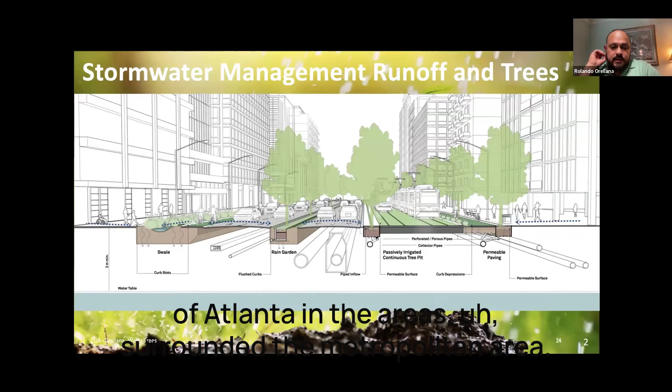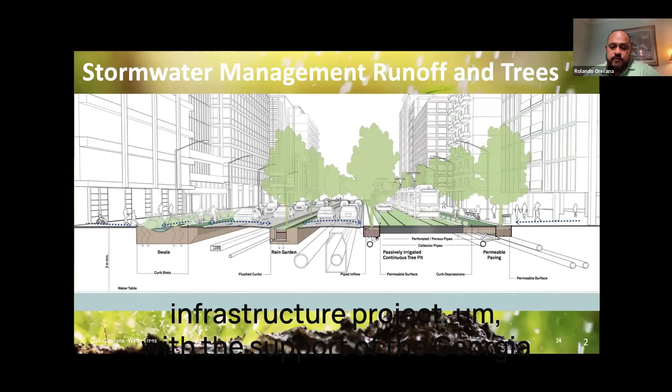This is a very exciting time to talk about stormwater management, runoff, and trees. In the city of Atlanta and the surrounding metropolitan area, trees are a big part of the industry, and stormwater runoff is becoming a problem for different municipalities and corporate and private developments. We are currently developing a green infrastructure project with support from the Georgia Environmental Protection Division and the EPA to create a demonstration site on the Griffin campus.

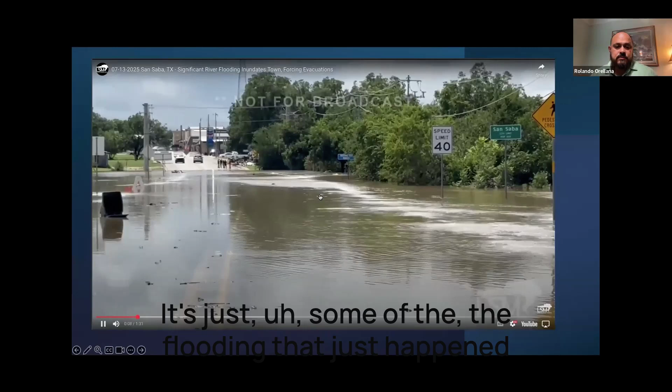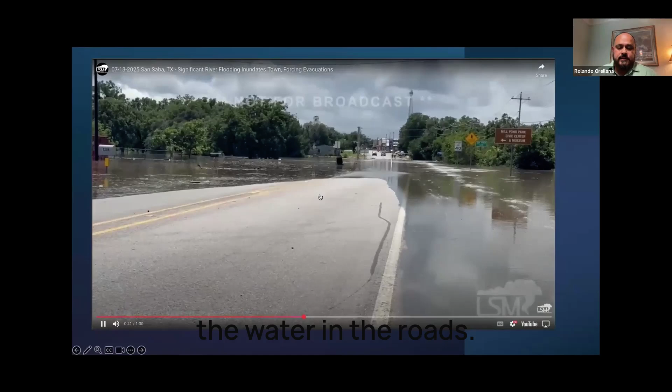So it's very exciting to talk about this topic today. I'm going to play this little video. There's no one speaking in it, it's just footage of flooding that happened in Texas, so you can see how stormwater is becoming more problematic every day as urban areas grow exponentially and infrastructure lags behind in some municipalities or cities. We have some fatalities shown here, as you can see the water covering the roads. It's a very devastating situation that happened in the state of Texas. You can see some of the highways and residential areas affected as well.

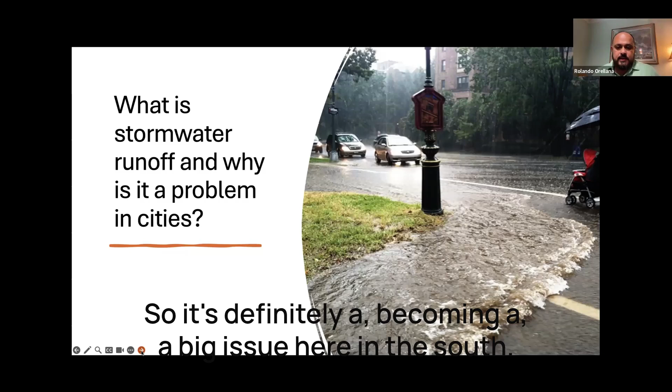So why is stormwater runoff a problem in cities? You can see the amount of water we get here in the state of Georgia. A couple weeks ago I was in Montana, and their yearly average is 13 inches. I think we get 13 inches within the first couple of months here in Georgia, so it's definitely becoming a big issue here in the South.

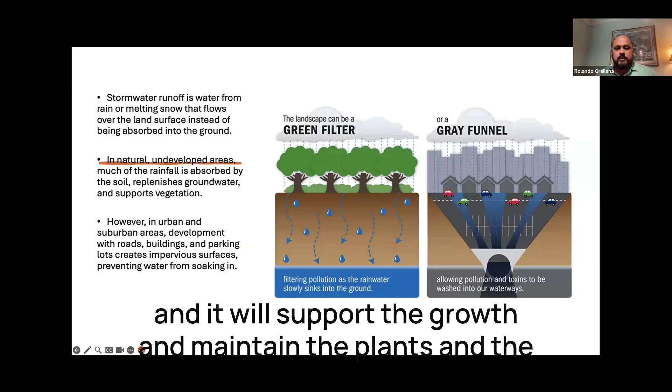The water we get from rain is so much that without enough infrastructure built in, all that water will just run off into rivers, creeks, and other water bodies instead of being infiltrated. In natural settings, rainfall is absorbed by the soil, which supports the growth and maintenance of plants, vegetation, and trees, following the normal water cycle. But in urban settings, that becomes a little more complex.

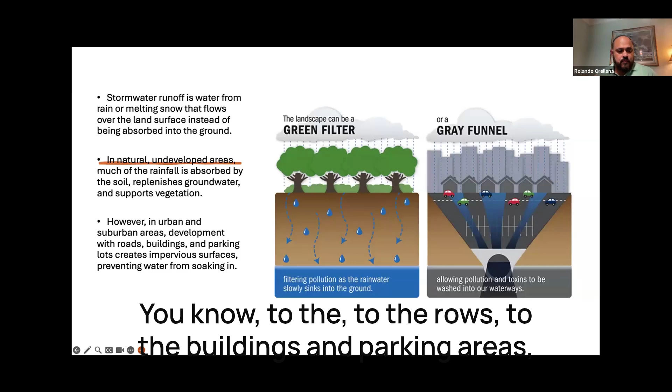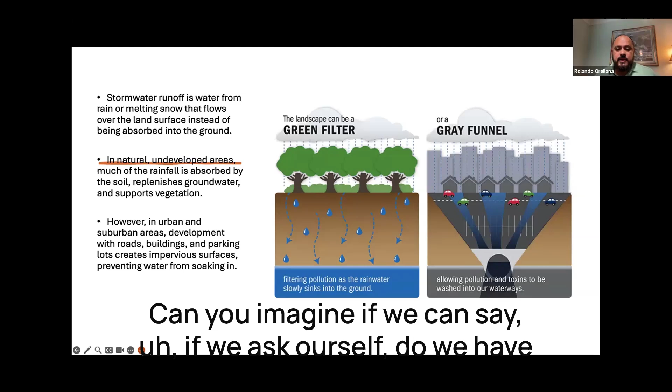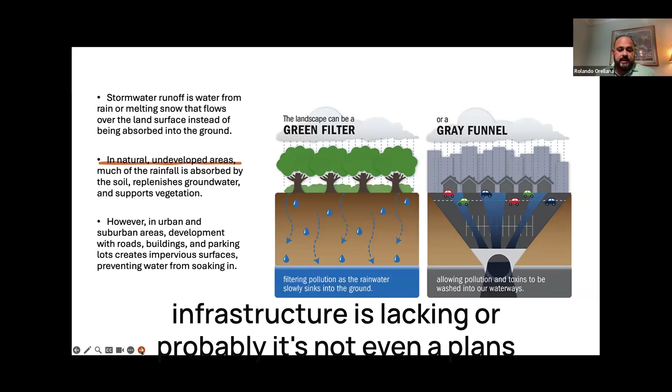Can you imagine if we ask ourselves, do we have infrastructure to help that water infiltration? Probably the answer will be no, because especially in developing countries, that infrastructure is lacking, or probably there's not even plans to build something that will better the water infiltration.

But in some areas it will go to other rivers and creeks and lakes, etc. And then eventually through evaporation it will go back to the environment, and then go through the cycle.

But some of those paths will go directly to the land. Some will be intercepted by the vegetation, so the trees. Some of them will be infiltrated. Some will be stored, and some will go back to the environment, to the evapotranspiration.

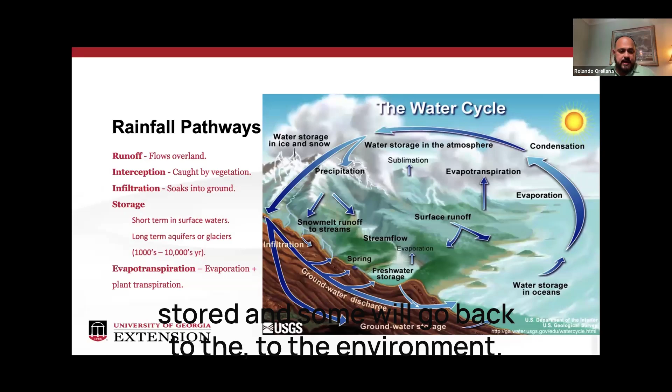Where is the problem? It is a problem, as we saw in the video. We've been having so many of those problems in big urban areas like the city of Atlanta. As you can see, the parking areas and roads are some of the more common and more built impervious surfaces that we have to deal with.

Because this will eventually collect so many pollutants, it will cause erosion and degrade the water quality in the ecosystems in general. This might be affected by soil conditions leading to infiltration excess overland flow.

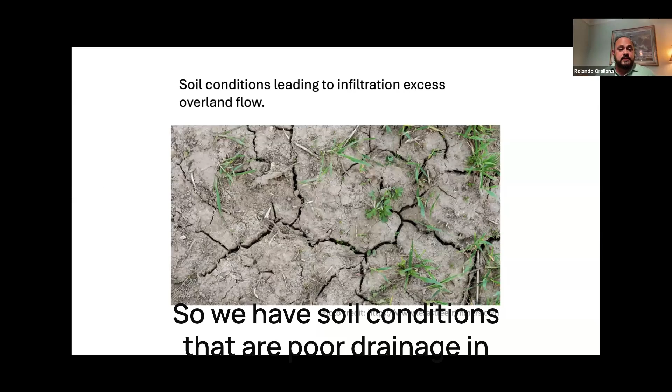So we have soil conditions with poor drainage. In the state of Georgia, we have the red clays, and eventually that leads to poor drainage. In the areas where we're going to have vegetation, we need to improve those soil conditions to better infiltration, or develop infrastructure that will support or mitigate that poor water infiltration.

What factors might affect that? In areas it will be the slope, how is the terrain, the vegetation, the type and density that we have, the soil structure - the silt, sand, or clay - and the drainage, what type of drainage we have available for the water, and the frequency of the rain that we have.

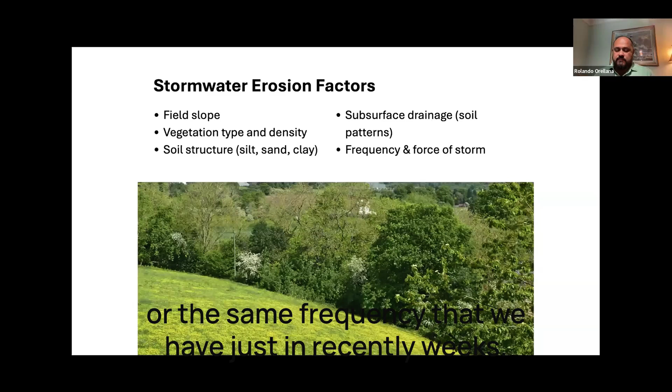You probably know this - I live in the city of Smyrna. There has been a lot of rain lately, but when I ask people that live in Griffin, there isn't the same intensity or the same frequency that we've had just in recent weeks.

How will the soil structure and infiltration affect that? Sands will infiltrate at a rate of 0.8 inches per hour. Loamy soils will be 0.2 to 0.4, and clay, with very poor infiltration, 0.04 to 0.2. In Georgia, we have an average infiltration rate of 0.2 because the majority of our soils is red clay.

High clay, compacted, poor infiltration. We have a lot of construction and development in the state of Georgia, and all that development - residential or commercial areas - is becoming, or making, the issue even bigger.

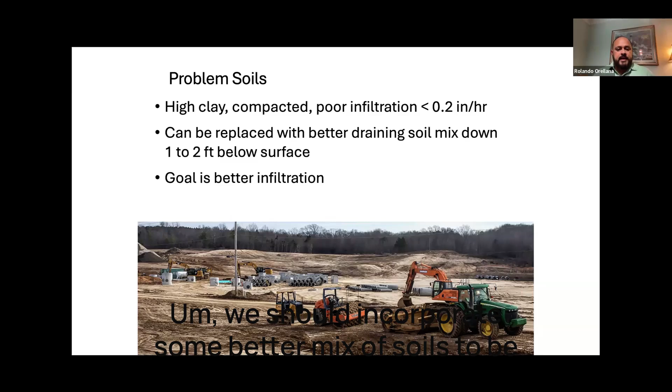We should incorporate a better mix of soils to improve that infiltration. We can add compost, topsoil, and manure and some of those things to better the water retention. UGA extension recommends 8 to 10 inches, depending on the area that you want to plant. But for trees, I would imagine this is probably even better.

This is some of the materials we will have for better drainage: vermiculite, mulch, compost, sand, and perlite will be something we should be more aware of and able to utilize when developing areas that will have trees.

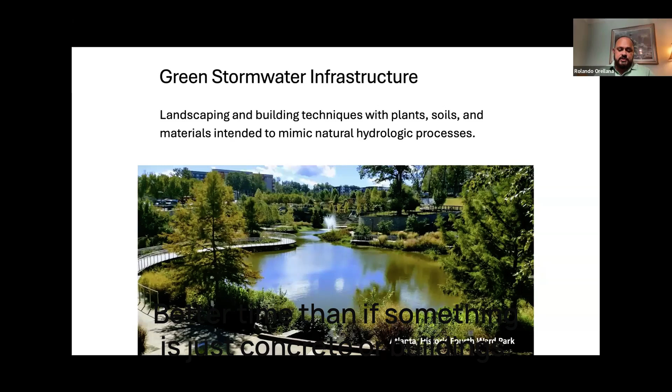You can see this is the Atlanta Historic Fourth Ward Park. This is a very beautiful place that mimics natural hydrological processes. As you can see, there's a combination of water, trees, and this green, beautiful space. I think that is something that will improve quality of life, and people will enjoy going on walks over there and having a better time than if it were just concrete or buildings and whatnot.

This is something that is great infrastructure - you see about the detention point, pond for storm drain.

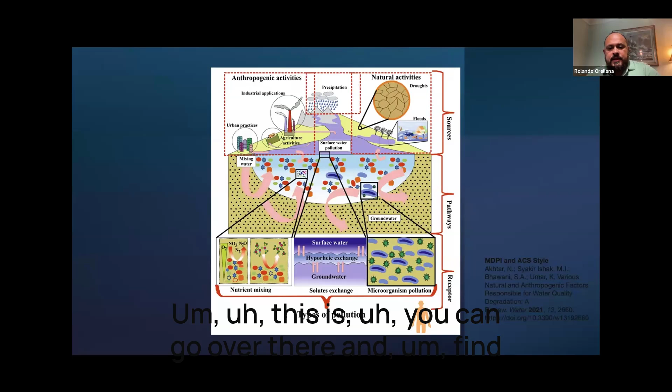This is a publication published by the University of Malaysia. You can go find this publication, but this is a very nice layout of how pollutants get into the water through all these processes, and how the pollutants get into the water masses. Why trees are important in our industry when we're talking about stormwater.

Trees are a natural stormwater manager. You can see here the rain, we've got the evapotranspiration, then the water infiltration. You see the water runoff in impervious surfaces.

You can see how big the tree ball is, and how nice it is. But when this tree absorbs water and translocates it through the vascular system of the plant or tree, and right now that we have very hot weather, the exchange of gases in the trees will be...

losing water. So that's going to make the trees require more water. And then when it rains, the need for water is going to be greater. So this will definitely mitigate stormwater runoff in urban settings, and it will support the infiltration and that water need.

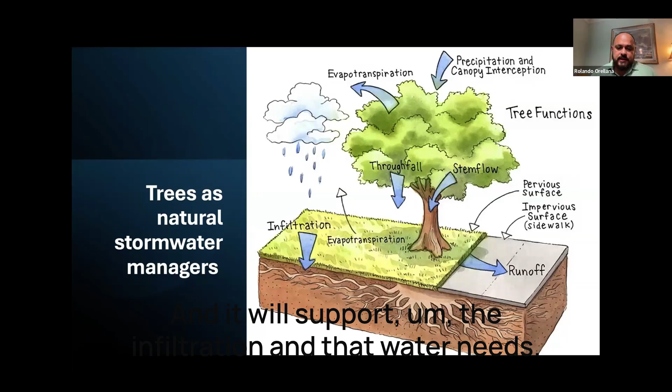So you can see here the interception and evaporation, or evapotranspiration. What happens is when the water hits the plant or tree leaves, some of that water will stay there, some will evaporate, and some of the water goes down through the stem of the plant and infiltrates into the soil, and then gets absorbed by the tree root ball.

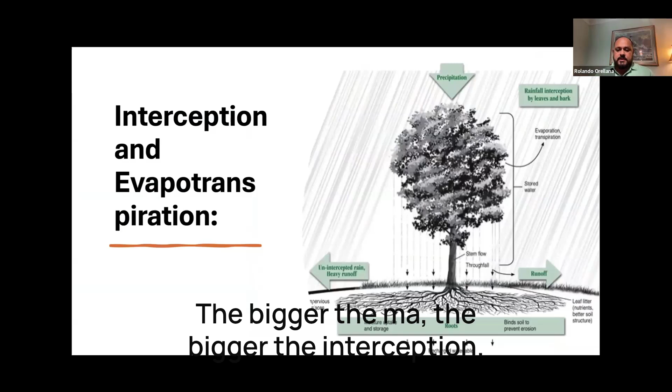The bigger the tree canopy, the bigger the interception. So that is very important. There is research that says trees will intercept around 13% of the total rainfall, or the full amount of rainfall. So that is very impressive.

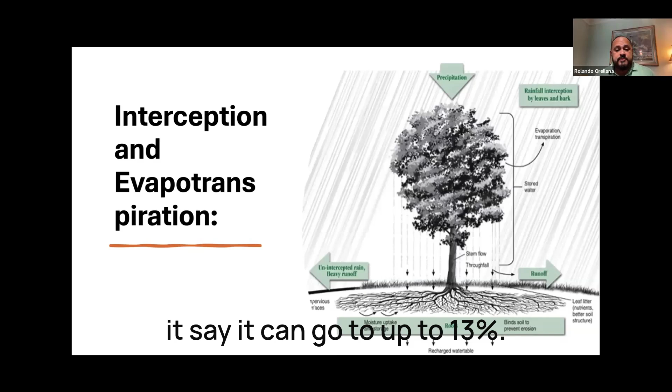But the research says it's around 8 to 11%. There are studies, especially in the northeastern United States, that say it can go up to 13%. So that's very impressive. The water that is in the leaves will evaporate into the atmosphere or be absorbed in the tree itself for transpiration, reducing the overall volume of runoff. So 13%, as you can see, is pretty good.

Mature trees are particularly valuable in rainfall interception because they have a bigger canopy and a bigger root system, so they cover a bigger area, and that is very important. That is why it's so important to provide the conditions we need for better tree establishment, and provide the conditions the tree needs to become mature.

Infiltration enhancement: tree roots and organic matter or leaf litter on the ground surface help loosen and aerate the soil in general. All that organic matter deposited into the soil supports water infiltration and water detention in the soil.

I know a lot of times here in urban areas, we blow away a lot of those leaves. So sometimes it's nice to let natural areas just keep the leaves so they can decompose and eventually become part of the soil structure.

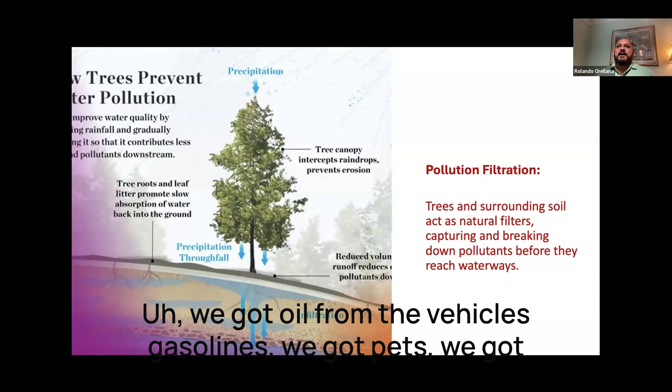Pollution filtration: trees and surrounding soil act as natural filters, capturing and breaking down pollutants before they reach waterways. We've got to think about this in cities - we have oil from vehicles, gasoline, pet waste, fertilizers, nitrate mixtures, so many different pollutants that will eventually reach the waterways through runoff. All those pollutants will be filtered, or at least mitigated, by having many trees in urban cities.

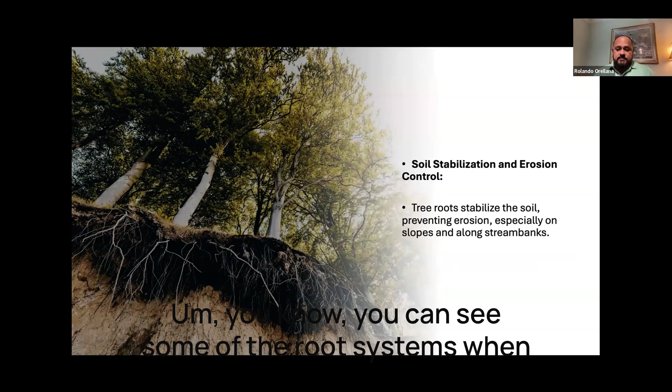Also, these trees support stabilization and erosion control. You can see some of the root systems when they're really well established - they're incredibly big, and they will support erosion management in areas like you see right here.

That leads us to how using trees in stormwater runoff or green infrastructure projects works. By the way, what is green infrastructure? You can see this is practices that help preserve areas and mimic natural settings.

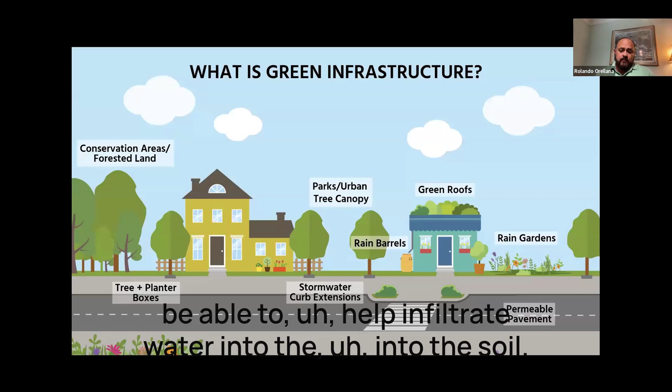As you can see here to the left, the conservation of forested lands - you can see all the trees - but then we have residential areas when we have urban and tree canopies. By preserving those and building better infiltration infrastructure, including green roofs, rain gardens, and bioswales, and disconnecting downspouts, we'll be able to help infiltrate water into the soil.

Some of the municipalities and other organizations in the state of Georgia have developed and built stormwater wetlands that support and help infiltrate that water into the ground.

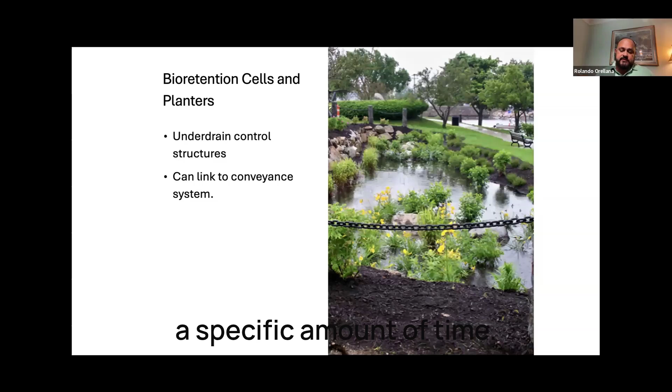Bioretention cells and planters. Some constructions there will have between 18 inches of gravel underneath, and then maybe a couple of feet of soil to be able to help infiltrate the water and retain it for a specific amount of time. Eventually that's going to go dry, and then there you have a good infiltration. But the 18 inch gravel layer will help support that infiltration.

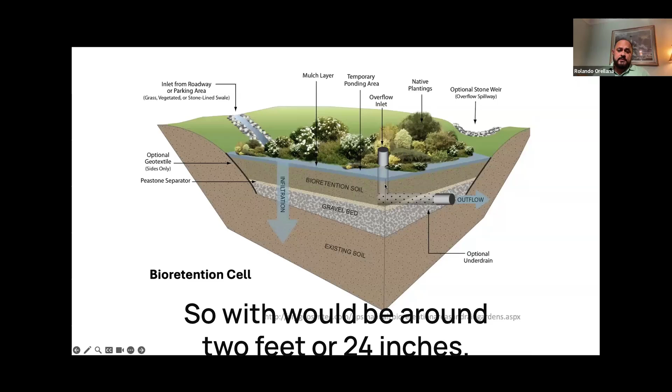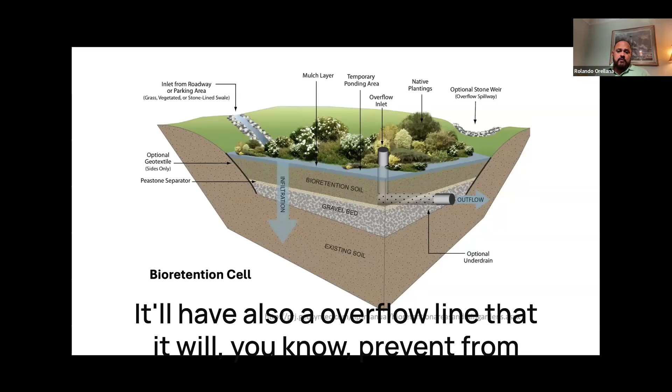You can see here a better sketch of what a bioretention cell is. You can see gravel in the bottom with the existing soil. Then you have the bioretention soil, which would be around 2 feet or 24 inches. Then you have some perforated pipes to be able to have the outflow of the area. And then the vegetation, as you can see, will be composed of native plants or plant materials that can be very useful. It will also have an overflow line that prevents the area from completely flooding, so it has a layer outlet for the excess water.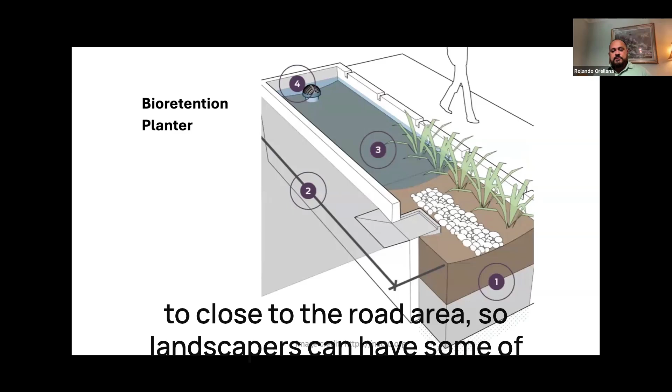Then there's bioretention planters. These are planters that go into the buildings and close to the road area, so landscapers can have some green spaces and also help mitigate the lack of infiltration. Vegetated curb extensions improve pedestrian safety and calm traffic, and there are some other benefits, but it also helps with infiltration.

They call it a bump out. As you can see in this photo, the drainage is right in this area. This is some of the other infrastructure you can use to lead the water to the soil.

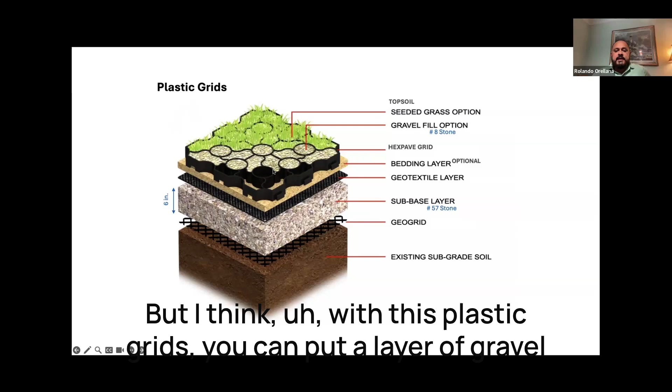Plastic grids - we're using some of these plastic grids. So many areas in the state of Georgia and the metropolitan areas like grass, but with these plastic grids, you can put a layer of gravel, and then you can still put a small layer of soil, so you can have grass. That gives you a very good looking grass area, but it's very permeable, and that supports water infiltration as well.

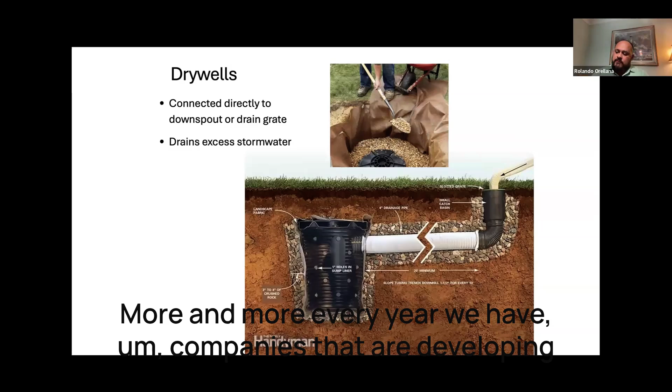Dry wells are probably very common, used to connect the downspout of your house, and they drain all that area. This is becoming a very common, not expensive, green infrastructure project. More and more every year, we have companies developing and presenting options for green infrastructure projects like this.

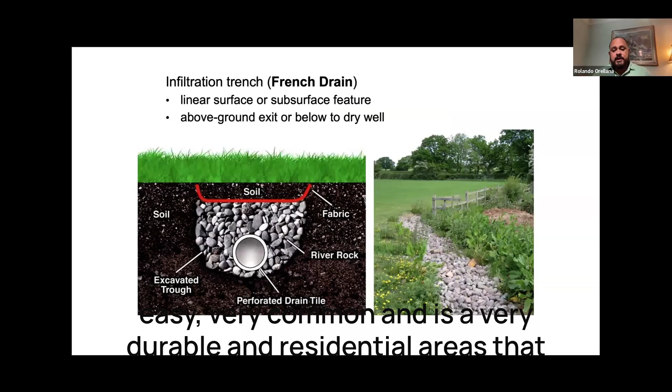French drains - we also built one of these French drains at the UGA demo site on the Griffin campus. It's something that is easy, very common, and very doable in residential areas.

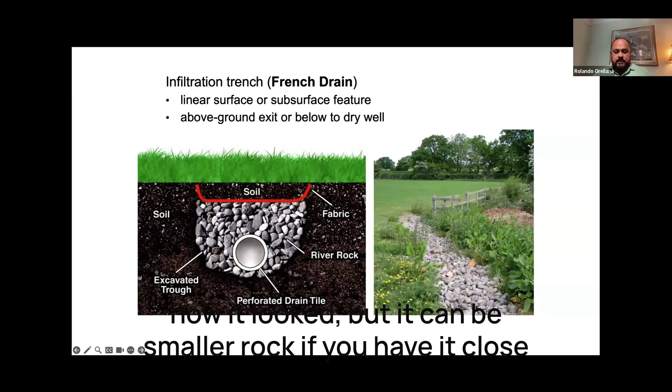Some of the other stormwater options that can be utilized: you can see here you have a layer of soil at the surface, then you plant your grass, garden, or ornamentals. Then you have this area with gravel or river rock, and then perforated pipes that you can have. You can see in the photo on the right how it looks. But it can be smaller rock if it's close to parking lots and more impervious surfaces close to buildings.

Then we have bioswales, which move water horizontally through vegetation. We also have one of those bioswales at the demo site on the Griffin campus. It's a very nice buffer zone before you get to the rain garden, leading all that excess water into the rain garden. These are also very common and utilized practices in green infrastructure.

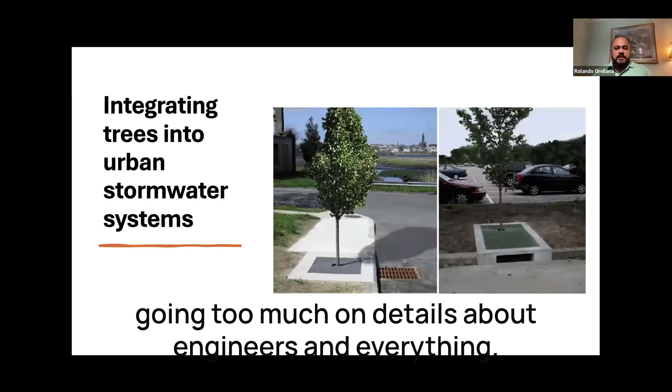Since the Georgia Arborist Association deals with trees, incorporating trees into urban stormwater systems is very relevant. So we're going to talk a little bit about that without going too much into detail about engineering. I don't want to come here and tell you exactly how to design this, since I'm not a landscape engineer, but I think we can touch on some of these practices.

Intentional tree selection and placement in urban areas is very important to understand, why you want to place a specific type of tree in an area, and in the areas that you want to develop.

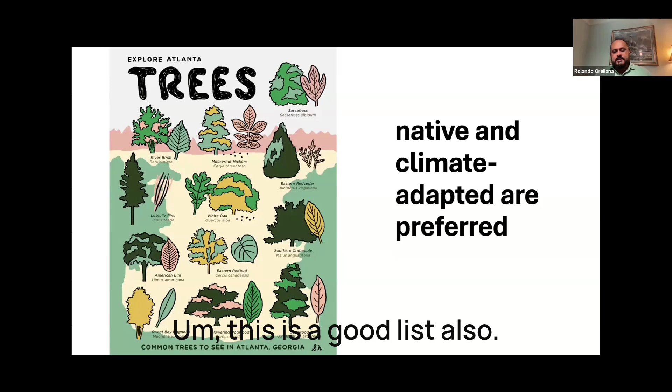Native and climate adapted trees - I was looking and found this book, Common Trees to See in Atlanta, Georgia. You can see river birch, loblolly pine, white oaks, and eastern red cedars are some of the trees you probably will be using in projects you will be working on. This is a good list. I also found this from a publication from the University of Georgia.

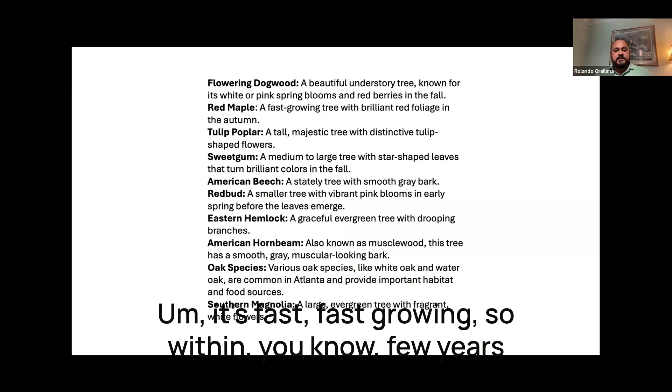Flowering dogwoods are beautiful, are very popular, and they're not as big. They will be appropriate for some very urban settings. Then we got the red maple. It's fast growing, so within a few years it's gonna be completely established and it will have this beautiful red foliage. And then the tulip poplars, the sweet gums, American beech, redbud, eastern hemlock - all those are really good materials that can be utilized in some of the projects. And you're probably already working with those type of trees.

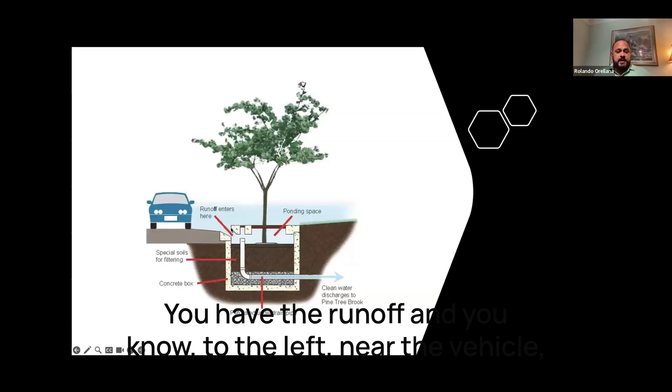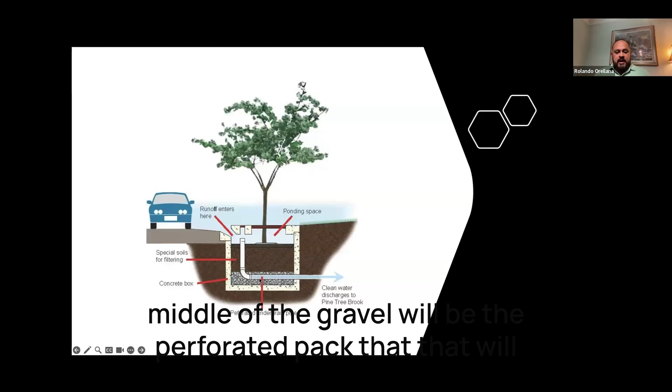Engineered systems utilize trees, tree trenches, and tree boxes. You can see this right here - these are becoming popular, this is in Iowa. The concept is that you have this tree in the area, you have the runoff to the left near the vehicle, and you have that surface. The tree will have a space in between the crown and the part of the stem, and then there will be a soil layer before you get to the gravel or perforated pipe. In the middle of the gravel will be the perforated pipe that acts as the outlet of the water, and the runoff will get into this area and drain into the pipe, leading away to the Pine Tree Brook.

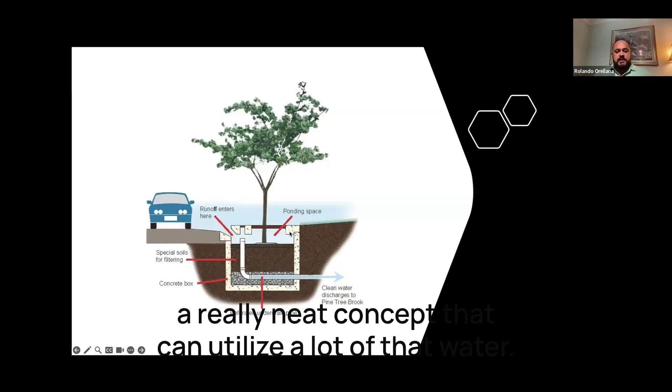This box is a really neat concept that can utilize a lot of that water. It can be used to support the trees. And if they are in a specific area, infrastructure can be built to support all the surrounding trees.

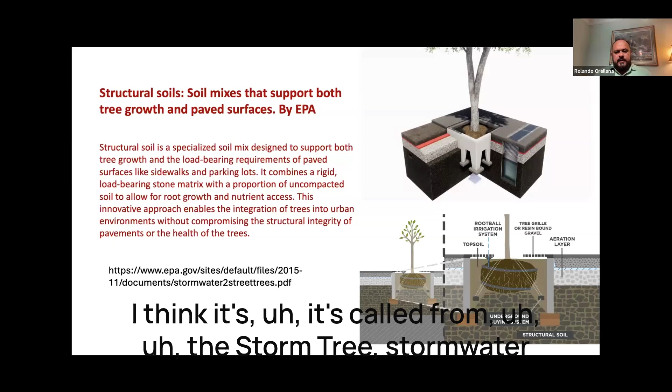The EPA has a publication, I think in collaboration with Davey Tree, about structural soils. Very good publication, I recommend you use it. I think it's called 'Stormwater to Street Trees.' That's a PDF you can download - this is the website where you can download that PDF.

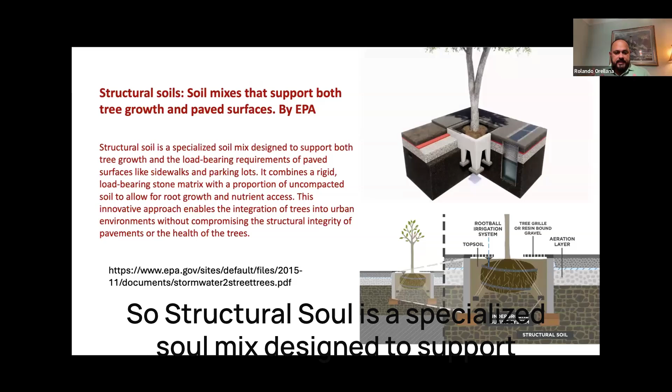The structural soil is a specialized soil mix designed to support both tree growth and the load-bearing requirements of paved surfaces like sidewalks and parking lots. It combines a rigid load-bearing stone matrix with a proportion of uncompacted soil to allow root growth and nutrient access. This innovative approach enables the integration of trees into urban environments without compromising the structural integrity of the pavements or the health of the trees. This is a very interesting approach, and it's very good research that was done for urban trees - I think you will really enjoy this publication.

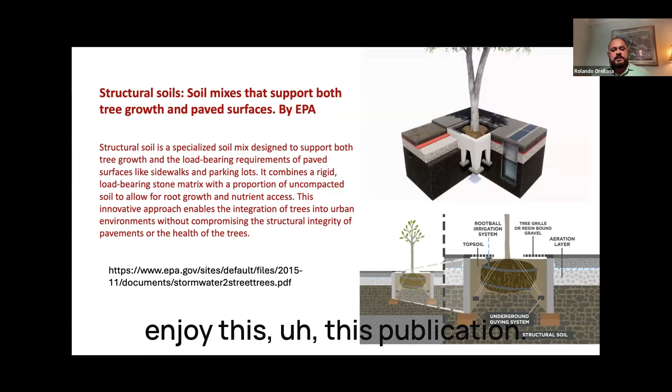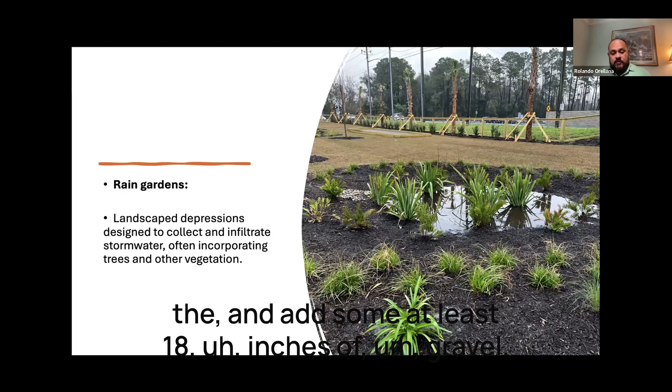It's a good read. Rain gardens have become a great way to help with stormwater runoff. They're kind of like a landscape depression designed to collect amounts of water and help that water infiltrate. Obviously you have to do some building and add at least 18 inches of gravel, and then a layer of good soil that supports root growth for the plants in the area, and that will support water infiltration.

In most cases, an area several times the size of the rain garden will collect that amount of water. It recharges surface aquifers, and it's low maintenance - we don't have to do a lot to it, and it's essentially a flower bed.

The mix is 50% sand, 25% topsoil, and 25% compost for the top layer, after the gravel, with no more than 10% clay. It should be about 20 to 24 inches, around 2 feet, so we have a good amount of loosened soil for the root system to develop very healthy.

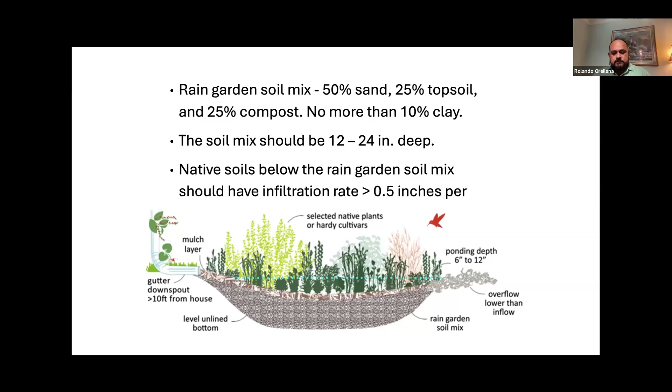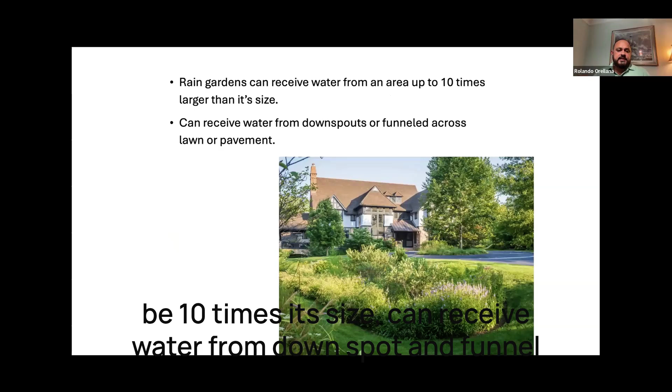It says they have an average of 0.5 infiltration inches per hour, and can receive up to 10 times its size in water, meaning the water that helps infiltrate will be 10 times the garden's size. It can receive water from downspouts and funnel across lawns and pavements.

This is some of the things that we did at the Griffin campus. We connected the UGA Research and Education Garden building downspout to a cistern, a collecting tank, and then connected that tank to the rain garden in the demo site. That's one good way to use and help that water infiltrate.

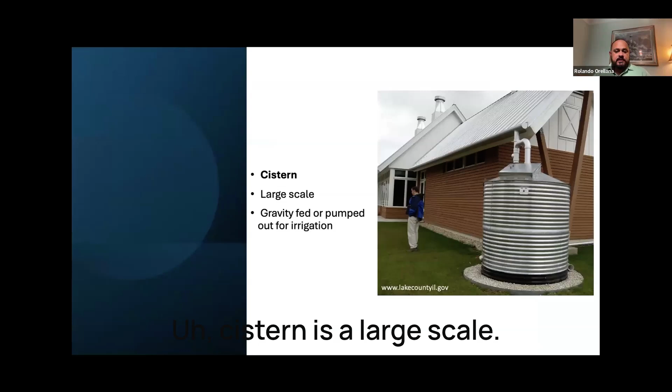So it's the same thing - a cistern is a large-scale version. Gravity helps it accumulate, and some of these tanks are bigger than that.

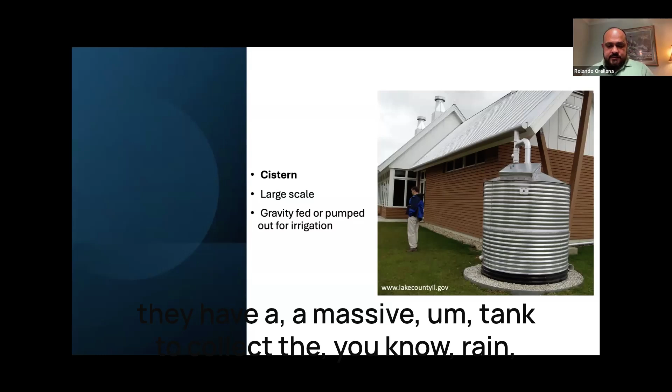Actually, the Coastal Botanical Garden of Savannah, which is a garden UGA manages in the coastal areas, they have a massive tank to collect the rain water and then collect it into that big system.

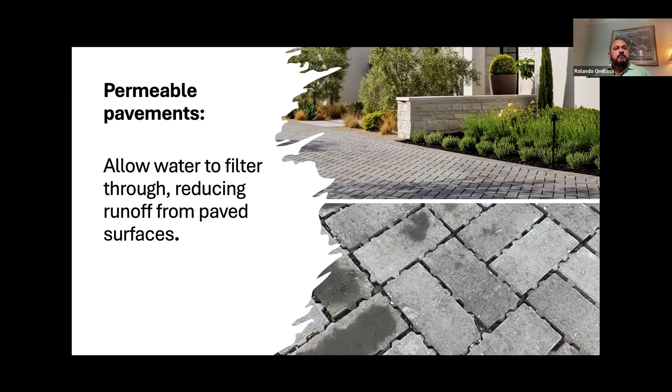Permeable pavers or permeable pavements allow water to infiltrate, reducing runoff on paved surfaces. This is great. I've seen so many different places where these permeable pavers have been utilized. I was impressed at how many pervious pavers are installed at Gwinnett Tech, for instance. They've been doing this for a long time, so a lot of municipalities are doing this now, and it's becoming very relevant.

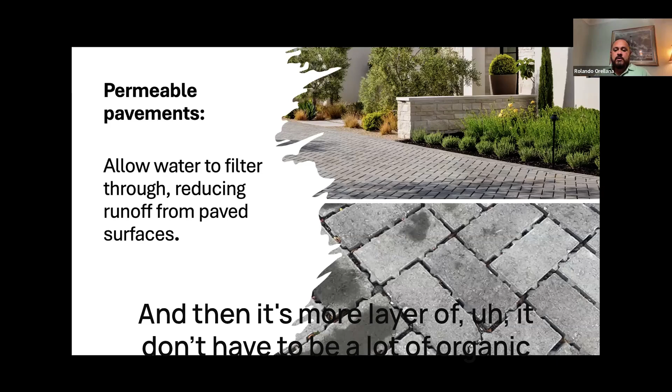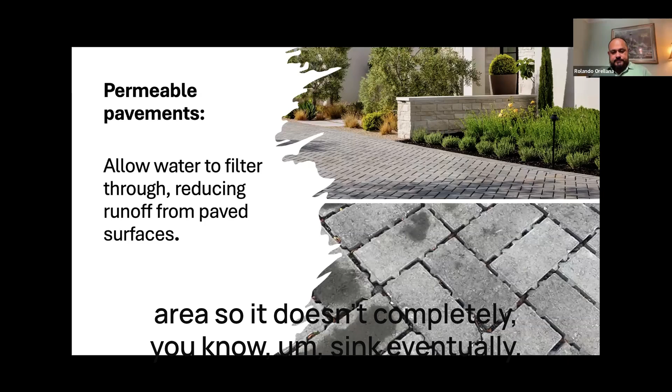The process on this will be to dig at least 18 to 24 inches deep in the soil and add gravel to support that, then a small layer of organic matter—it doesn't have to be a lot because there's not going to be much growing there—plus some loosened soil to help with infiltration, and that will sustain the area so it doesn't completely sink eventually. The gravel will support a lot of the weight.

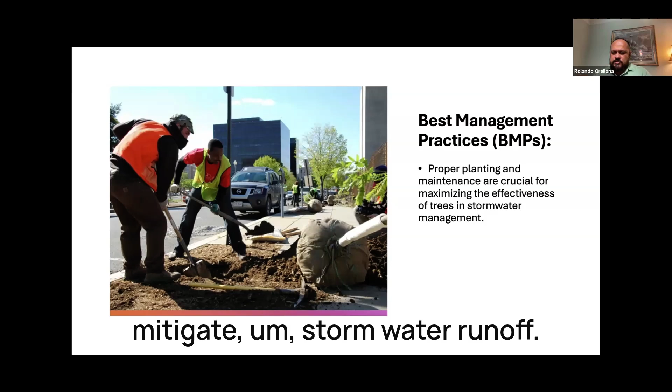So we have to remember we need best management practices when we incorporate trees into the cities to mitigate stormwater runoff.

One of those things is proper watering, pruning, and mulching, and protecting trees during construction. You probably know that trees are most likely to die during the establishment period if they don't have enough water access. Providing that water will protect the trees from eventually dying, because they're susceptible at that time of establishment. Providing mulch and other surface covers will protect them and help retain a lot of the water.

Remember, the majority of the water requirements—trees will grab the water from the soil, and the larger they get, the bigger the requirement they'll have until the first couple of years, until they completely build up the root system and can provide for themselves and search for water in the soil. So that's very important.

Some people utilize those gator bags, and those gator bags are good and they're bad. They're good because they hold water right there. They're bad because people forget about them and don't replenish that water, so then they're used for nothing. I think if there's a company, manager, or organization that's very committed to establishing those trees and using those gator bags, that will be a great tool.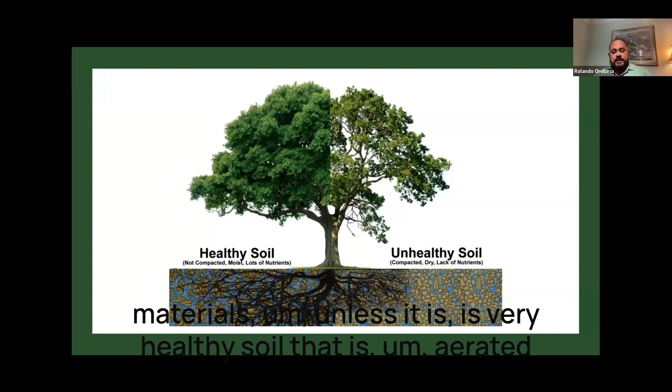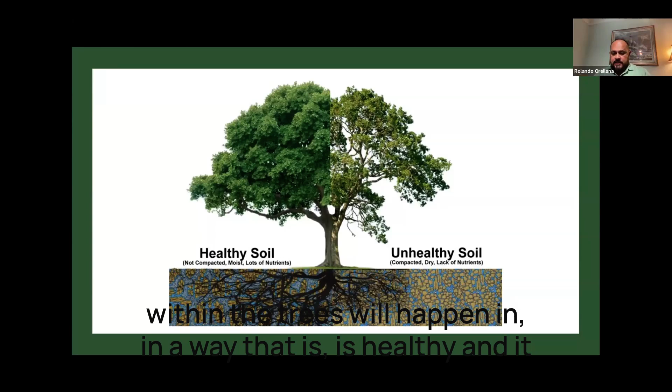Obviously, avoid having trees on compacted soils. You're probably very familiar with this—when we have compacted soils, we get very poor quality plant material, unless it's very healthy soil that is aerated and has enough looseness so infiltration can happen, the water can be retained, and the trees can utilize the excess water. All the physiological processes within the trees will happen in a healthy way that supports their growth, and we'll have beautiful trees.

Some of the benefits: trees are the lungs of the cities or the area, so it's important to have that air quality. By having more trees, we'll have better air quality. That's something added to the benefits of having trees, along with mitigation of stormwater runoff.

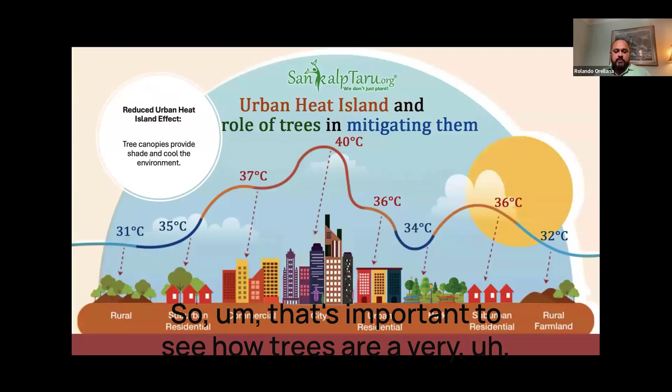I like this one—temperature or cooling in the areas. Park areas you'll see average 34 degrees in certain areas, while very developed, populated areas will be 40 degrees Celsius. So that's important to see how trees are a very important part of cooling in different areas.

Increased biodiversity in habitats—trees provide homes and food sources to urban wildlife, which is very important to remember. That's something you'd like to remind your clients when you're bidding for projects and whatnot.

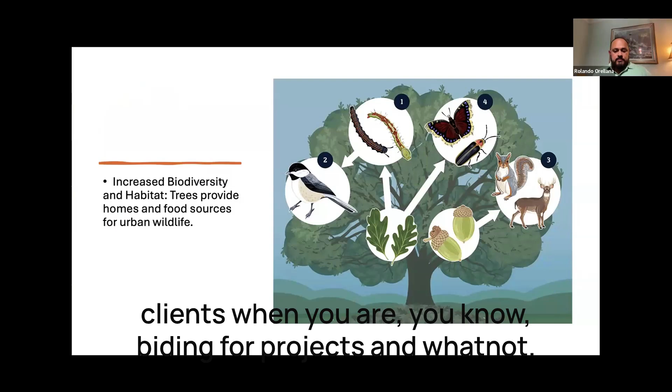Obviously, and this is across the board—not just the green industry, but across the board in industry—one of the reasons people do things for trees, for landscapers and everything, is to enhance the landscape. It provides property value, and that is very connected. That's why the green industry is so big in the state of Georgia. Not just turf and ornamentals and trees, but everything as a whole is a network of practices happening to enhance and beautify landscapes in the cities and areas that utilize those services. So that is directly connected to property values, and that is very important to sustain.

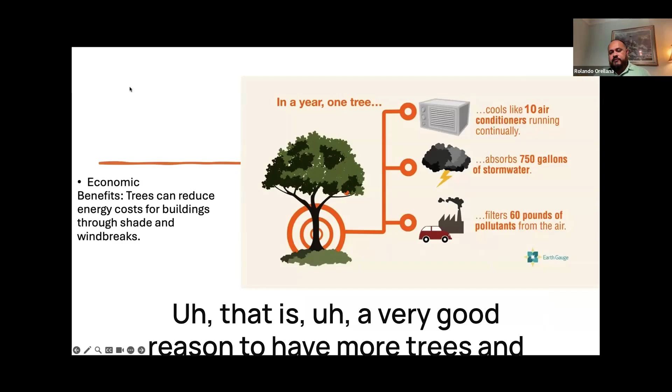Economic benefits: trees can reduce energy costs for buildings through shade and windbreaks. In a year, a tree will absorb around 750 gallons of stormwater - that's a very good reason to have more trees. It also filters around 60 pounds of pollutants from the air and cools the equivalent of 10 air conditioners running continuously. This is very important to remember when using trees for stormwater runoff mitigation projects.

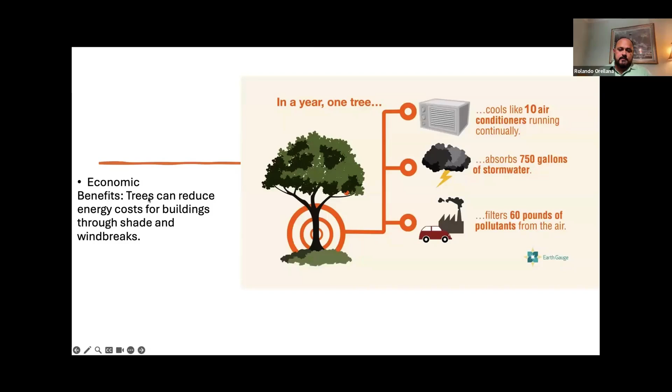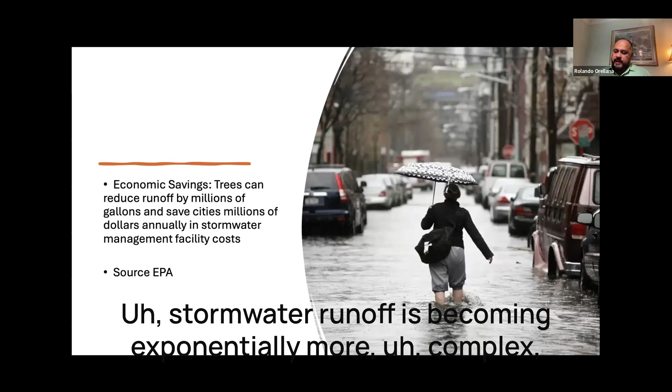The EPA says in that publication I was talking about, the economic savings from trees can reduce runoff by millions of gallons and save cities millions of dollars on mitigation. Overall, stormwater runoff is becoming exponentially more complex. In smaller cities or sleeping communities, as they're called, they're growing with a lot of green infrastructure or mitigation for water infiltration, adding more and more to the program.

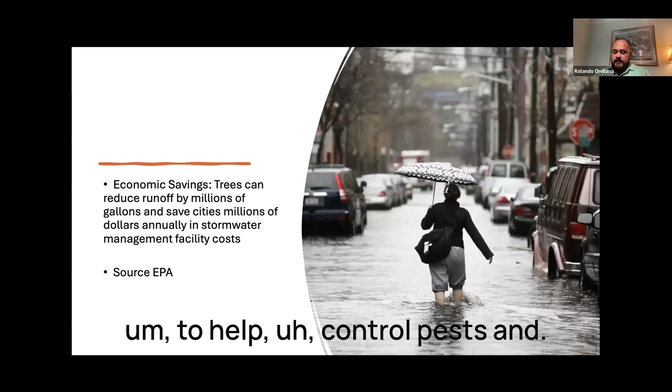The landscape industry uses an incredible amount of chemicals - granular fertilizers and chemicals to help control pests - and that's part of the pollutant, along with pet feces. All of those are things we're not thinking about when we're developing sites.

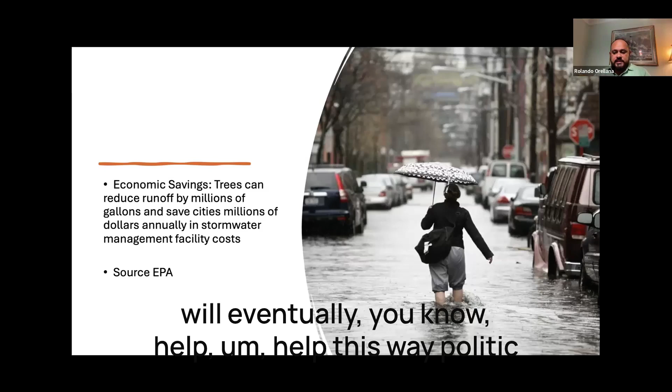In municipalities, I think progress will be influenced by its residents, by people developing and investing in these practices. I think you, as companies or members of the tree industry, pushing for these practices will eventually help persuade politicians so they can invest in green spaces and more stormwater runoff mitigation practices.

The EPD fully funded this project, called the Green Stormwater Demonstration Site. We have 9 green infrastructure practices. You can see here to the left, that's the removal and reinstallation of impervious pavers, and the installation of pervious pavers that we have here.

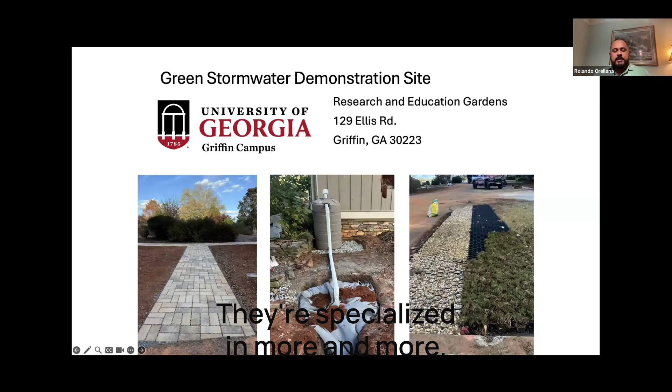That work was done with a local landscape company - they're specializing more and more. Then there's the installation of a water collection tank, which you can see is connected to the bioswale and the rain garden. And then we have a French drain in this grid.

As you can see, this plastic grid - we will install some grass in it, and then leave it with gravel. This is along the road, so vehicles can drive by without it affecting anything. This could be utilized for driveways or other areas in residential or even commercial areas.

The project will be finalized in the next couple of months. We are in the process of developing extension publications for each of the practices, and there will be a ribbon cutting in the next month or two, since we're also building signs with QR codes so people can scan them and go to the publication with photos of that particular practice. The goal is to help residents understand how easily those practices can be achieved at their homes or residences.

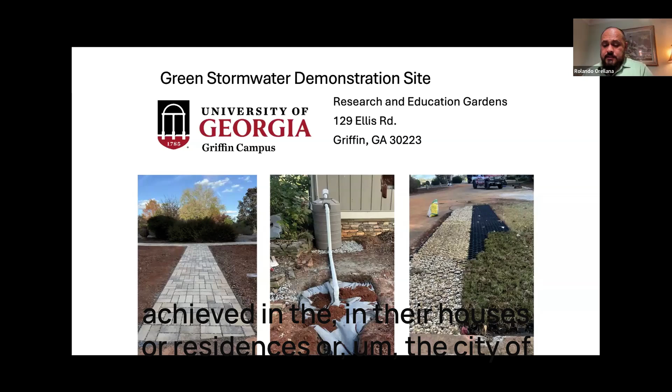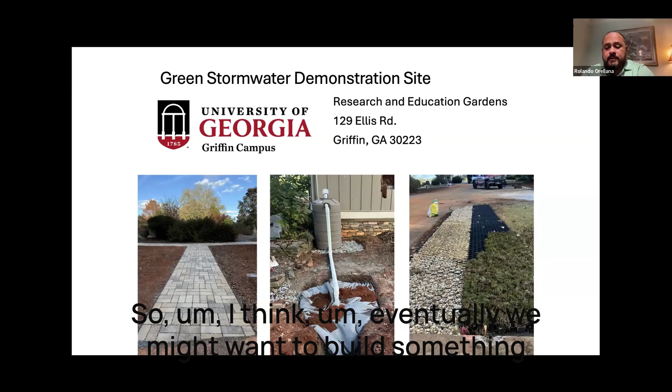The city of Griffin is also very interested in developing these practices in parks and other common areas for residents. We're also in the process of an additional grant with the EPD and EPA to replicate this site in the coastal area and the Savannah area. Eventually we might want to build something similar, or more appropriate, for the city of Atlanta. I think this is a very good time to get into these green infrastructure practices in the United States.

So I don't know if you have any questions. Maybe I went too fast, but I was terrified I was going to go too slow because I have 60 slides. You did great. Thank you. There were a couple of questions.

One question: can you provide the article reporting that trees capture 13% of rainfall? Yes, I will look that up and send you an email, if that's okay with you. I'll send an email and you can share it with the people who attended the event today.

I think that publication came out of New Hampshire, and I thought those were very good numbers, so I captured that. I can definitely send out the publication for you guys to have. Great - this is being recorded and will be on our YouTube channel. I'll send a link to the recording as well as a link to that article.

Regarding the bump-out feature, is there any evidence that the rate of infiltration decreases as the plants mature and fill more of the soil space? I am not very familiar with that one.